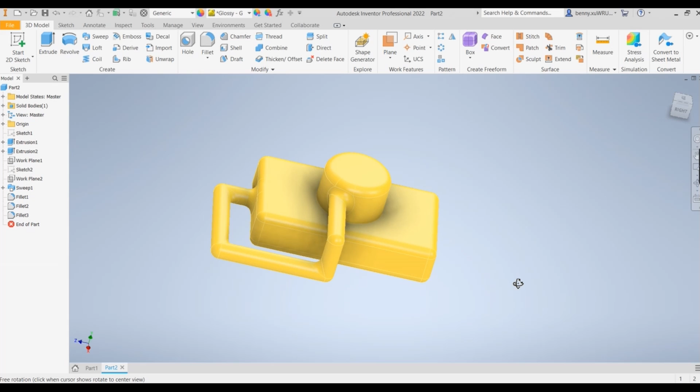Hello everyone, today I'm going to show you how we can create this 3D model. Look at the structure, you've got top parts, bottom parts, looks like a pipe joined together and running down from the top to the bottom. Just have a look at this. All around there's no sharp corner, so we fillet them. Even the joint here, we're going to just fillet it. So let's start.

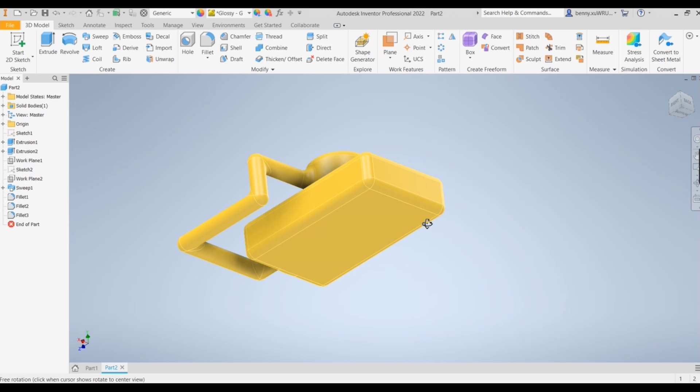I try to start with the drawing with the parts, then select the plane, X and Z, center point rectangle. I put 25 mil, tab 40 mil. Then I go to circle and I put 20 mil.

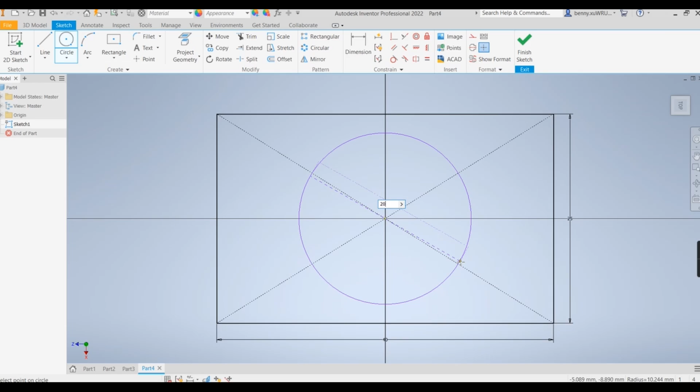Okay, so finish this, then the extrude. I would like to put this just 10 mil. Then another one, so these parts I change down to 5 mil. Okay, click on OK.

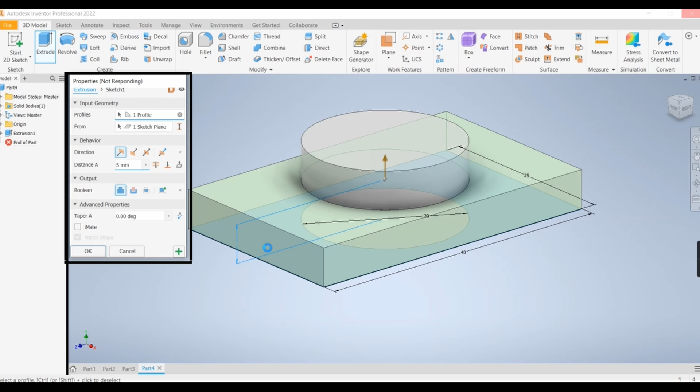Then that's finished. The joining parts will be coming out from the top and going down to the middle of the bottom parts, then running to the left, back, and then join to the center of here. So we've got horizontal way and the vertical way.

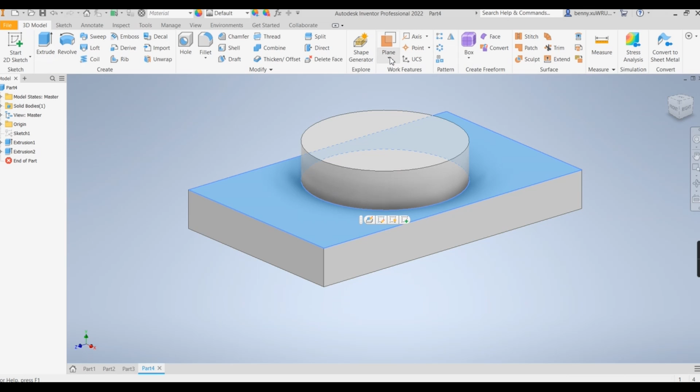So let's do the horizontal first. Click on there and I make a drawing there. However, the drawing will be horizontal, so this is parallel with this plane. So we select the offset. This one there, you see the arrows going up, so I'm not going to put it up. I want to put 2.5, minus 2.5

and enter. All right, click on this plane and make a drawing. Okay, I select this one. All right, and then start from there to coming out. Maybe I put 20 mil.

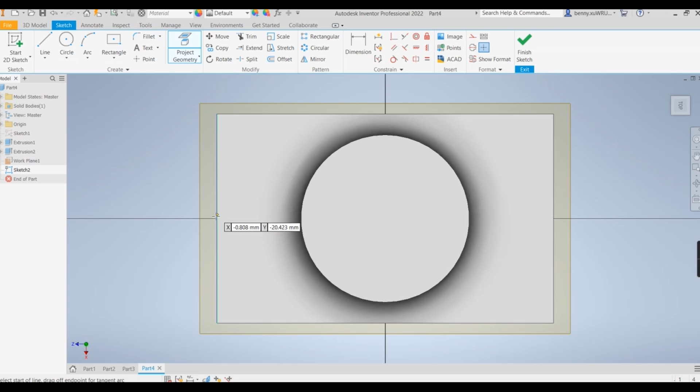Then I'm coming to here, now the 20. Then I'm going to here, 35. And that's finished.

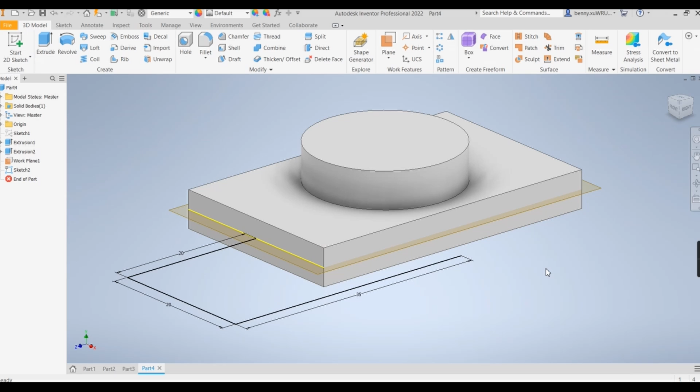Because this level is already done, now I need to draw up. So that's the vertical way. Vertical way you can draw from here parallel with that, and also you can use a different technique to do it. Turning around, I get a plane, go to this point, click on, see that, and double, just click and click, and you can draw it on there.

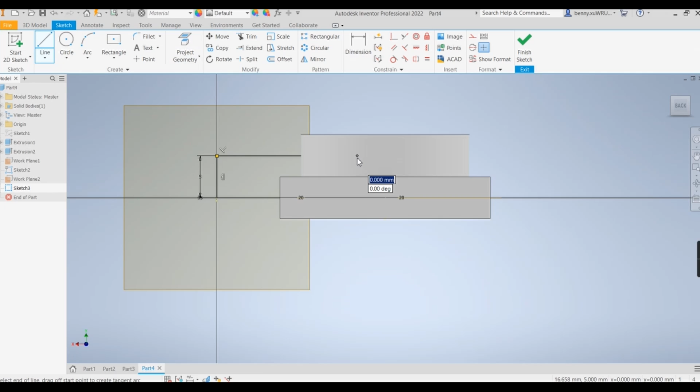Doing this one first, this point, 5 mil, and all the way in. You don't need to worry, you see some of the parts you can't see it, but anyway, it's in there. It's in there anyway. Okay, now finish.

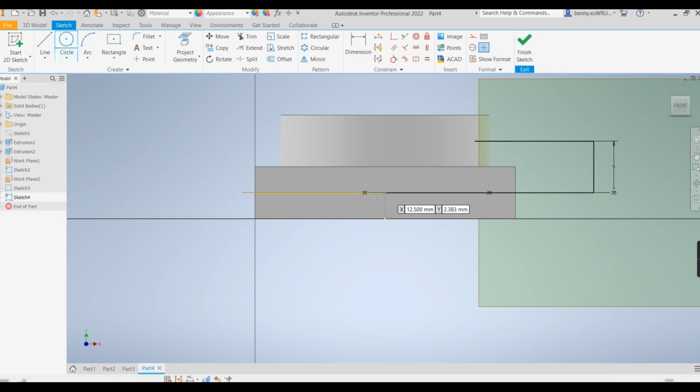I'm going to draw a circle there. So on this plane, draw a circle, just project. So 3 mil.

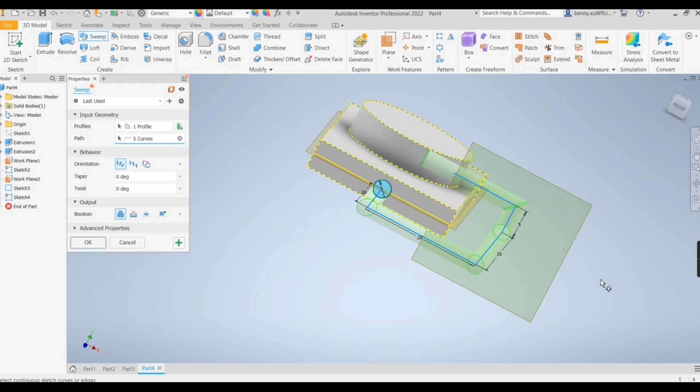Okay, now if I go to sweep, they will automatically select this one, and you only need to select the path. They go in there and then say OK. Now I can turn all this one off by visibility, turn off, and this one.

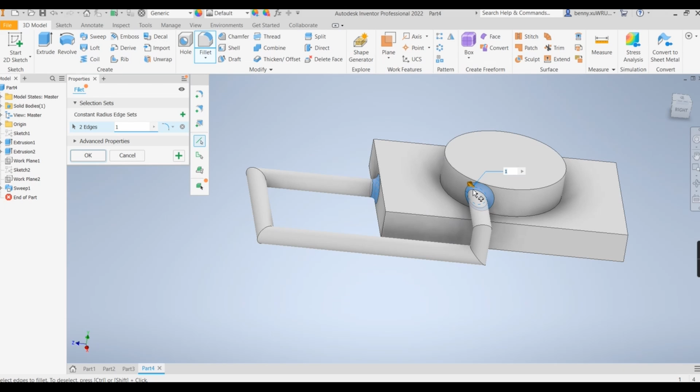Okay, fillet. And I would like to put 1 mil. And then I fill this one, fill this one all around, so you can see straight away.

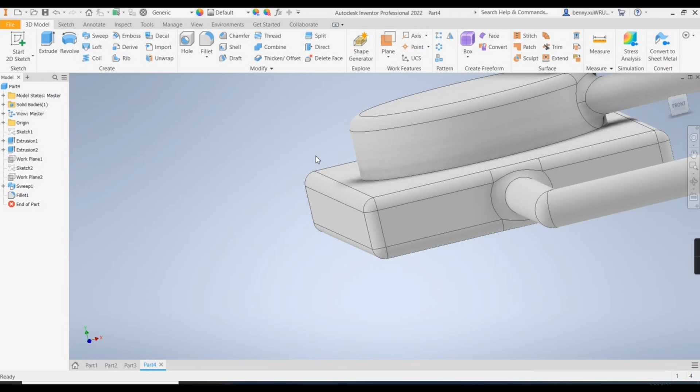Okay, for the finish off, you can put any color you want. This is a very fancy color and shining, so you can see this straight away. Okay, thank you.